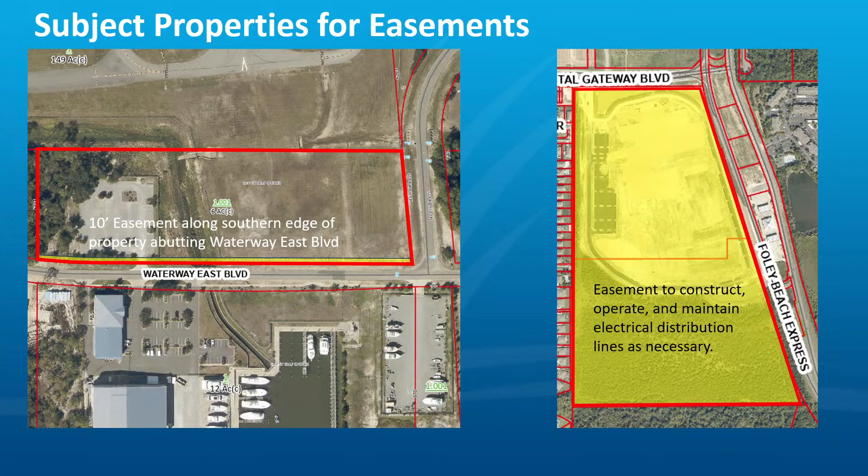So no budget implications, and staff recommends authorizing the mayor to execute these two easements, and be glad to answer any questions for you. Okay, thanks Clint. Any questions for Clint on these two easements?

I have one question, and it's not so much about this easement, it's on that Waterway East project. On the south side of that road, the multipurpose trail is a really wide trail and a really good trail, and looks like it will be utilized a lot as that develops down there. However, there are a couple places close to Saunders that have transformers located right in the middle of the multipurpose path, as well as some poles that are right in the middle of the multipurpose path.

I'm not sure what happened there, or if there's a fix, or what options we have at this time to improve that, because right now they have orange barrels in front of the transformer and the poles, and it's just not an ideal solution.

Well, that's what these easements are to help clean up. If we get the easements, we've got to get a couple more from other property owners, and then those lines will be located on the north side, so those will go away and get out of the trail.

Good, thank you, Jason. All right, Clint, what you got next? The next one is a supplemental services agreement for Barge Design Solutions in an amount not to exceed $35,000.

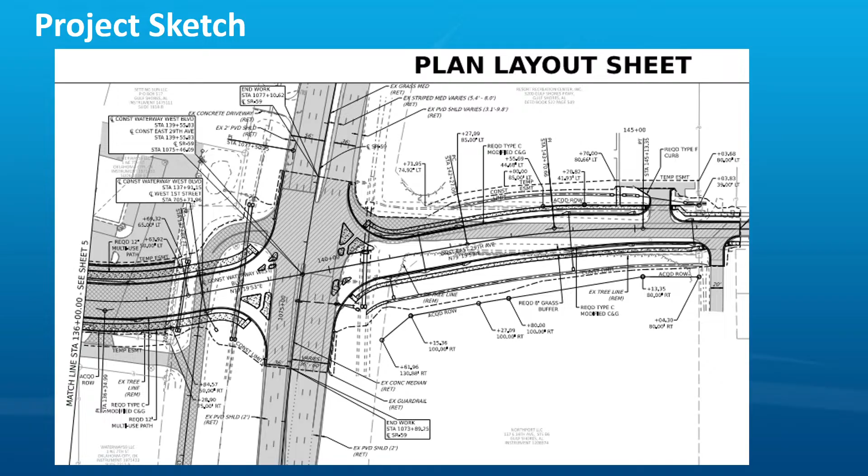These funds are going to be included in the professional services of the project budget, next year's budget, account number 42879655515, and we have known these were coming for a while. Staff recommends approval of the supplement for $35,000, and I'll be glad to answer any questions.

Thanks, Clint. Phase 1, does that go all the way to the roundabout north of Legendary Marine? No, right now Phase 1 base bid is going to go just to the west of the hotels, and then the alternate is to go the rest of the way. So it's going to be included in the bid, and the design is included in what Barge is doing, but we're going to have everything past the hotels as an alternate.

Yeah, that was my question — the design from Barge goes... Yes, Phase 1 of the design is to the roundabout, and then down to the south.

Okay, and I assume we looked at the entire route of Phase 1 design, and the utility locations we found in conflict are all we anticipate. Yes. Anybody have any questions for Clint on this item? Anybody from the audience? Thank you, Clint.

Next, the one I've got is a professional services proposal from Jade Consulting for the Restore ALDOT Capacity 4 South project in the amount of $728,990. A little bit of background: back in 2018, we were awarded the Restore grants to increase capacity and enhance efficiency between Highway 59 and Foley Beach Express.

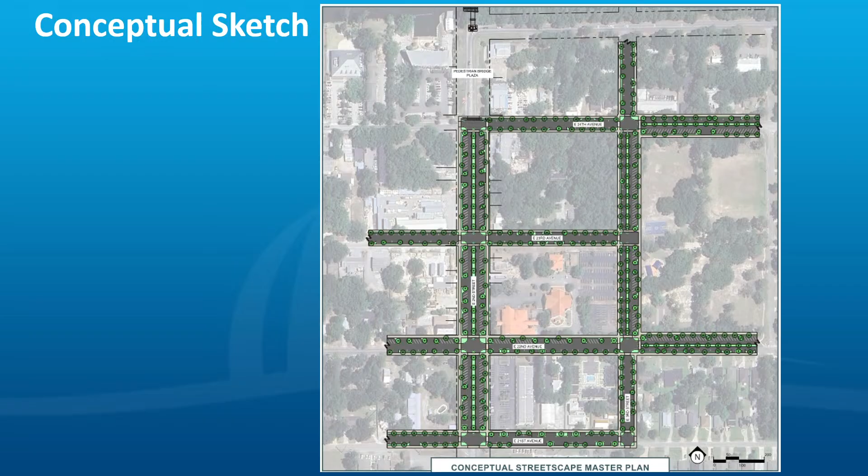This was just a conceptual sketch that we put in the RFQ documents, just to give them something to go off of. Basically going from Canal Road, down 3rd Street, down 2nd Street, and then the connections between the two to improve access and install as much parking as possible in the area. This was just illustrative, so it will change once they get in there, get their survey done, and submit their conceptual design to us.

So these funds, we have $400,000 budgeted in this year's budget for these design costs, and the remainder will be in the '26 budget, under a different account next year, that 42 account. And just a reminder, the Restore grant is just under $8 million for the construction of the project.

Staff recommends authorizing the mayor to approve the contract in an amount not to exceed $728,990, and we'll be glad to answer any questions you have on this one. Any questions from the council? Anybody in the audience?

Yes ma'am, sure, come on up. Hello, my name is Marina Krishmarjankar, and I'm one of the property owners next to the path you guys proposed.

I really like that new parking you guys put right next to my property, it's really neat. The only problem is whoever installed it didn't realize it used to be a ditch, and now the water collects there and drains into my property. I hope you can get a consultant who knows how to do the roads correctly. The water used to flow right where those 7 new parking spots are, it used to be a deep ditch, and now those are parking spots, so the water has nowhere to go but into my gate.

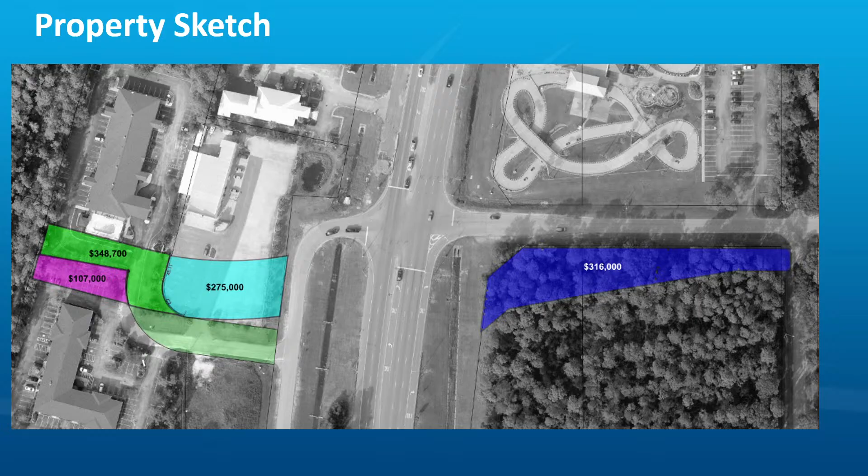The funds for these acquisitions are included in the project budget in 25 and then the remainder in 26. So what this resolution will do is authorize the mayor to negotiate and accept contract purchase agreements between the property owners and the city of Gulf Shores for the purchase of real property to be utilized for public right-of-way, in an amount not to exceed just over $1 million. Glad to answer any questions if you have.

Thanks, Clint. Any questions for Clint on these right-of-way purchases? Anybody from the audience? Okay, thank you Clint, appreciate you working on those items. Thanks. Anna?

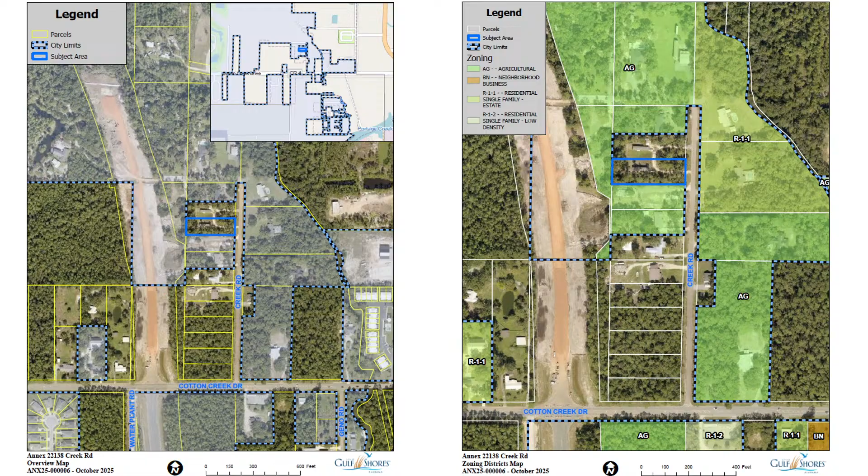And the adjoining property parcel, how is that zoned? I believe it's also AG. It's AG as well? Yes sir. So not much change in the county zoning to our AG zoning? Correct. Okay, any questions for Andy on this application?

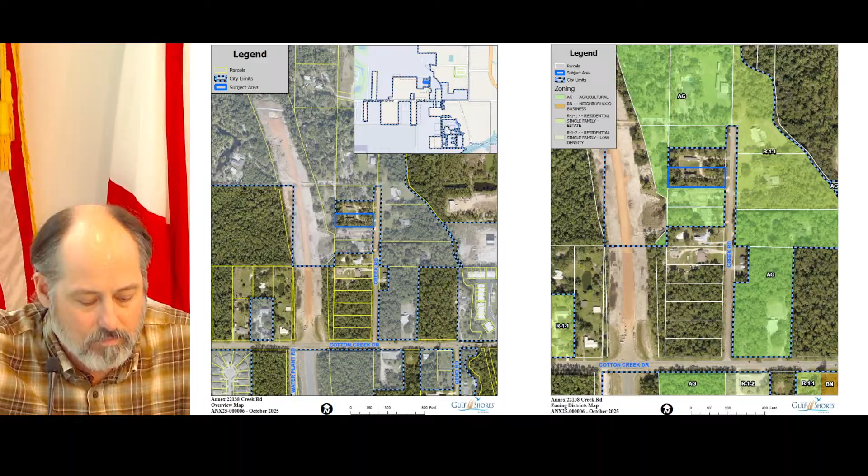Okay, you have another? Yes, two more. The first one is ZA 2527, an application from Mr. David Kelly. He seeks to rezone 5 properties located on County Road 6 to general business zoning district.

2 of the properties are currently zoned R4. The other 3 properties are zoned R-1-4. Here's a view of the existing condition of the property.

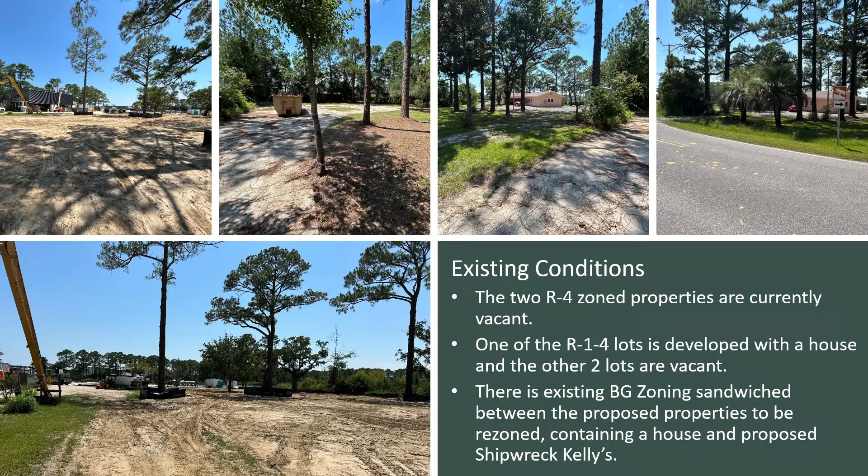The 2 R4 properties are currently undeveloped. There is a single-family dwelling on one of the R-1-4 zoned properties. The 2 other R-1-4 properties are undeveloped.

So the existing zoning, again, is R4 for the 2 northernmost properties. R4 is a multifamily zoning district that allows 20 units per acre and typically is developed with multifamily dwelling units such as condominiums or apartments.

It's developed with the proposed Shipwreck Kelly's retail restaurant business, and 4137 was rezoned by the city council to general business earlier this year.

Mr. Kelly does own all of the properties involved in the rezoning request, as well as the existing general business zoned properties. All of the properties proposed for rezoning are also within the Plash Island Bon Secour River Overlay District. This overlay district restricts building heights, densities, and allowable uses on the property.

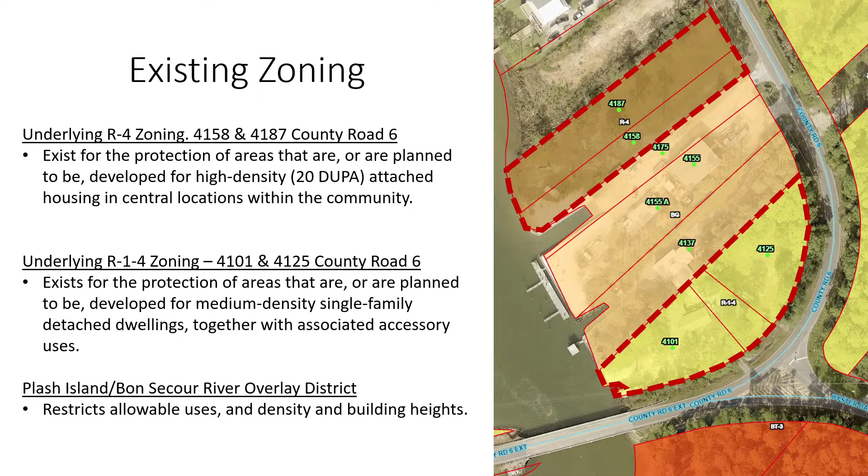The proposed general business zoning district allows a range of retail, commercial uses. It's kind of a medium density and intensity business zoning district. Most of the business is located south of the Intracoastal Waterway along Highway 59 or zoned general business, to give you an example of what general business allows.

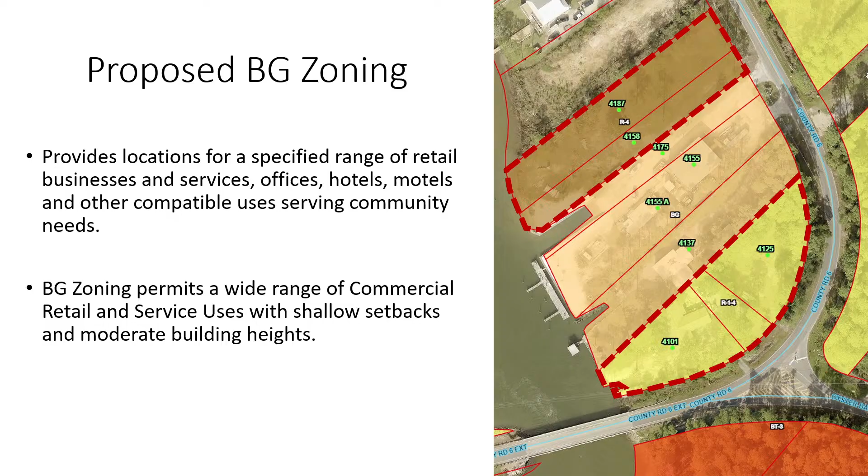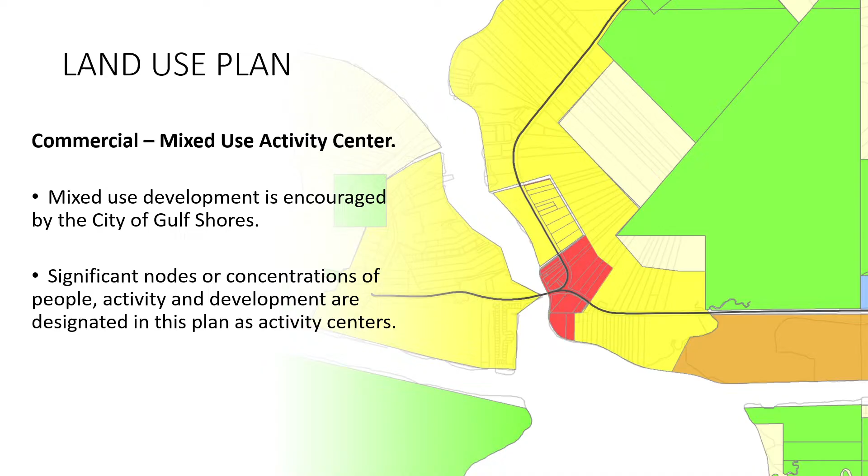The land use plan designates this property as a commercial mixed-use activity center. Basically it recommends this area of the city develop in a commercial type manner to serve the surrounding residential houses in this area of the city. There's really not a lot of commercial zoning out there currently.

The proposed rezoning does support the goal of the land use plan to develop as a commercial mixed-use activity center. The BG zoning will allow for non-residential uses that are compatible with the surrounding residential community, mainly because it's also within the Plash Island Bon Secour River Overlay District, which restricts a lot of the more intense uses allowed by that BG zoning district.

So with that, staff and the Planning Commission recommend the City Council approve the rezoning of the property to general business. This application will not come up next month. We do have to advertise it for, I believe, 22 days, so it'll probably come up in November for a public hearing.

Be happy to answer any questions.

Andy, is the density and height allowed in our BG zoning more restrictive than the overlay district? So let's see. BG does not allow... so I think no residential uses are allowed by right. Multifamily is currently allowed by conditional use permit with 20 units per acre. Plash Island Overlay District restricts it to 15 dwelling units per acre.

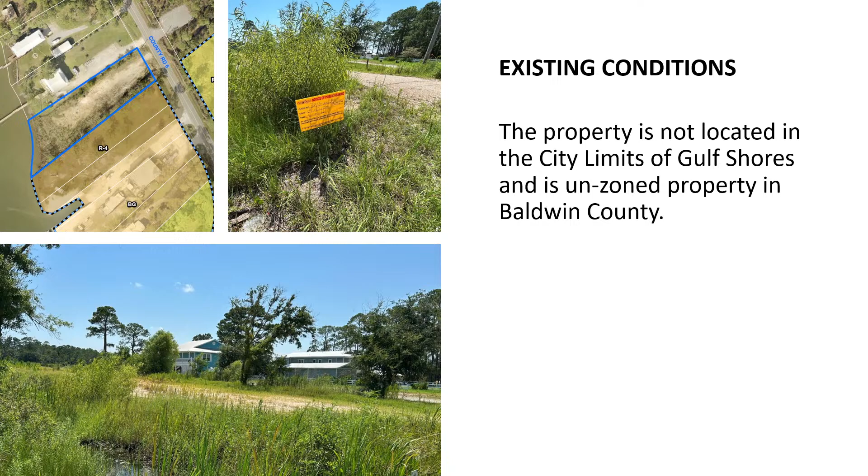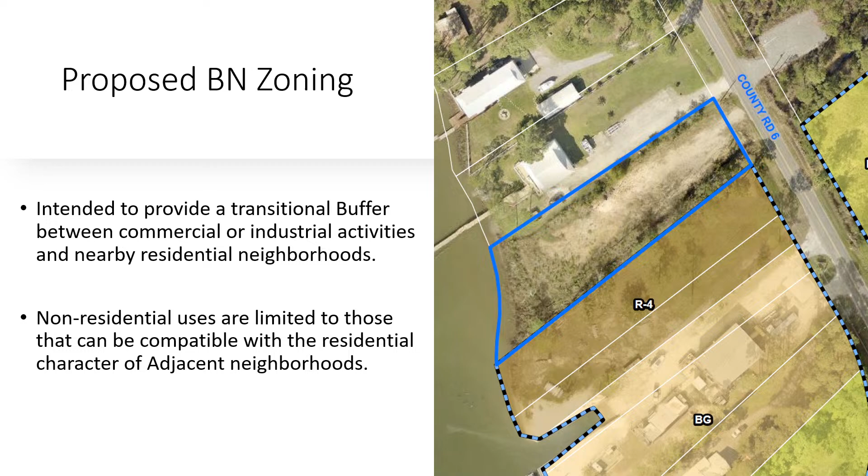The proposed neighborhood business zoning district is intended to provide a buffer between more intense general business zoning and single-family residential houses, and the types of uses are very restrictive to comply with the surrounding neighborhood residential uses. The land use plan designates this specific property as medium-density residential, but again, it abuts that commercial activity center we just spoke about.

We believe that rezoning this property to neighborhood business will serve as a transition between the BG zoning, if that occurs, and the surrounding unzoned single-family uses north of the property. Again, the BN zoning district greatly restricts the type of commercial uses—for example, only 5,000 square feet of building floor area unless you get a CUP approval. Operating hours are restricted from 6 a.m. to 10 p.m., and there's no warehouse, storage yard, or industrial type uses allowed in the neighborhood business zoning district. So staff believes the configuration of this property and its location complies with the goals and intent of the neighborhood business zoning district.

Both staff and the planning commission recommend approval with one condition to limit the potential impact to the single-family house located north of the subject property: multiple family uses are not allowed. The BN district does allow multifamily uses at 10 units per acre, but we do not think those are appropriate here. And like we discussed with the last application, we believe you should place a condition on this property if it's rezoned. I'll be happy to answer any questions.

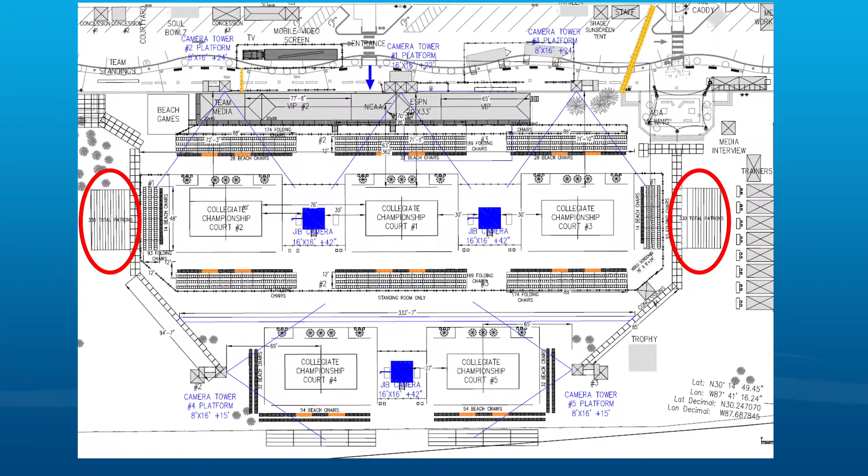On the map in front of you is the location where we anticipate putting these bleachers for the national championship. The goal is to increase additional general admission and general seating, which then allows us additional seating capacity for courtside seating and for some of the VIP experiences, et cetera. So in working with the NCAA, they like this concept - it will give it a little bit more of a championship stadium feel.

So these are not inexpensive. To purchase two of these, it's an amount of $260,000. Now, one of the benefits of purchasing these grandstands is that we can use them for instance, the state track and field championship, football games, and other volleyball tournaments. They'll be able to be used throughout the year and then brought to the beach for the national championship.

I mentioned Senator Chris Elliott. He was able to acquire $200,000 in a supplemental education budget award, which would leave a $60,000 shortfall, and we recommend pulling that from the $190,000 annual appropriation that we will put into our budget each year for the staging of this National Beach Volleyball Championship through 2031. So with that, I'd be glad to answer any questions.

There is a little bit of a timeline on this. We need to purchase these soon because they are built to order. And if we want them delivered in April of 2026, we have to move fairly quickly, which is why I wanted to bring it to you today. So I'm glad to answer questions.

Grant, I've got one - I know we got wide roads, how wide are these as far as transporting? I know we got signs and different things. Right, so they'll travel behind a typical F-250 pickup truck and fit within a travel lane. They don't need wide load permits or anything like that. Okay, so they're very portable. They're heavy, but they're bigger - 45 feet long. So really, we would get escorts, but they can handle any kind of roadway that we have here in town.

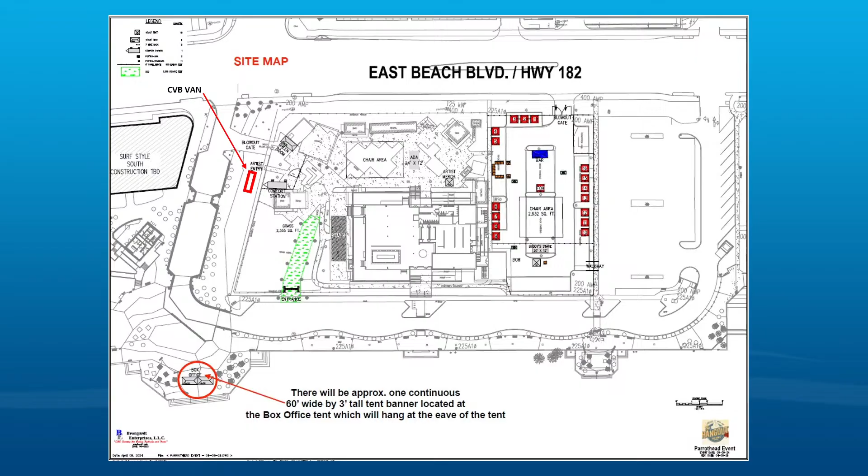This application has been reviewed by all city staff and is ready for your action, and would be recommended for approval. Is that the same location for the box office that we did last year? Exactly, yes sir. Thought so. Yeah, it was very well done. Any questions for Grant on that application? Okay.

So next is a new event. Sunny 105 is hosting a walk, run, crawl Saturday, November the 15th, from 2 p.m. to 4 p.m. in the Waterway Village area.